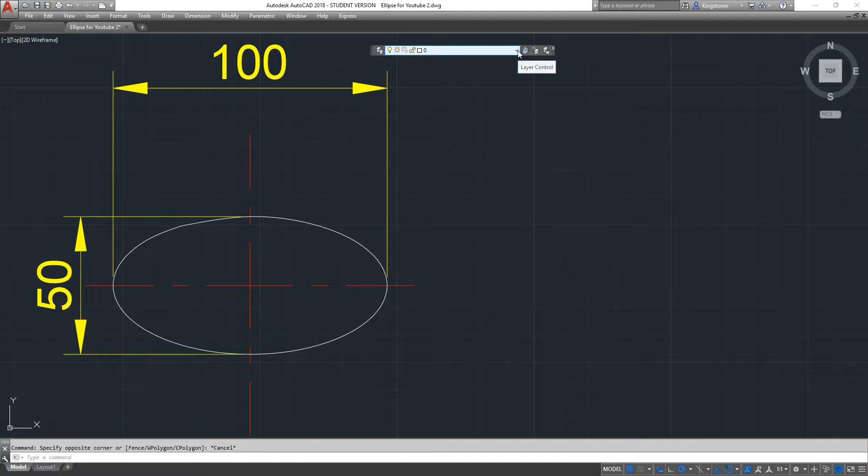So I'm going to turn the circles on that I've drawn. When I push the button, there they go. So you can see the minor axis, I've drawn a circle here at 50 millimeters in diameter, and for the major axis I've drawn a circle here at 100 millimeters in diameter. So that's how we're going to draw it. They're dead over the center, as you can see.

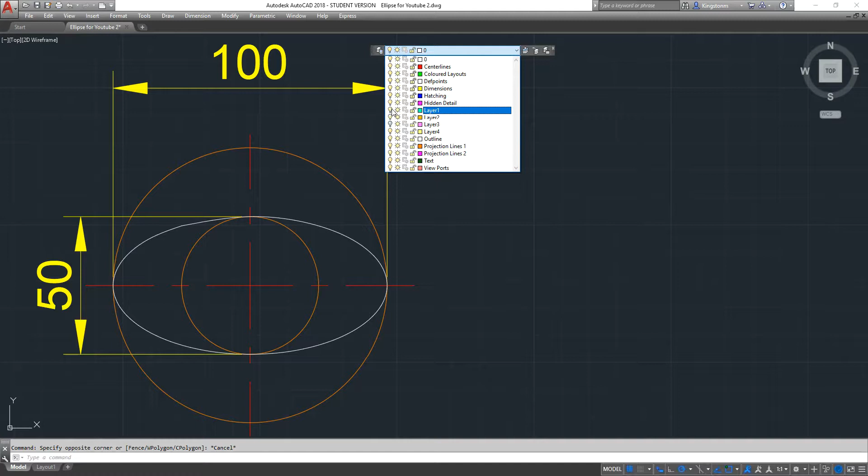Now what we do is we put some projection lines through the center of the circle. So we've got a whole lot of lines going through here. These lines can be at any angle, so long as they fit within the 90-degree quadrant. You can put as many lines through here as you want.

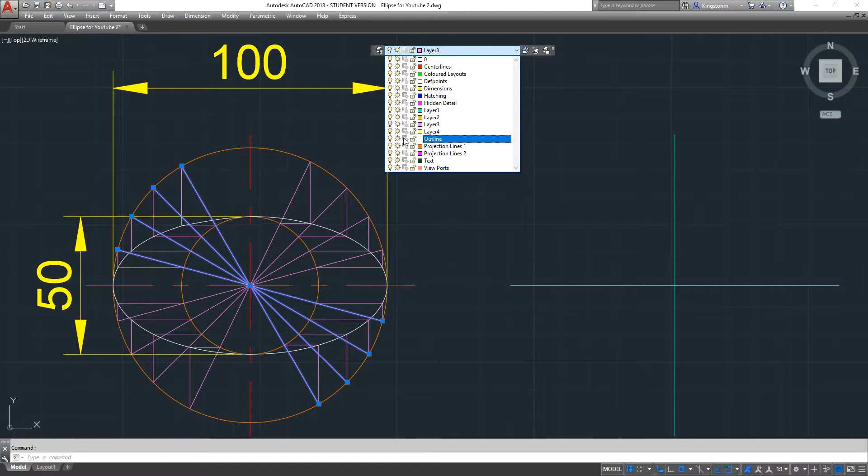It's actually better to have them slightly closer to the center or on the horizontal line, instead of having more up in this portion, because the curve across through the top is actually quite shallow, whereas the points on the end that you're going to have to put in, it's turning quite hard through this area on both ends, so you need a few more points through there. So what I'm going to do is I'm going to draw one beside it just to show you.

So I've got these two lines here, which I'm going to turn into center lines for you. So these are my center lines, so we're going to get into it.

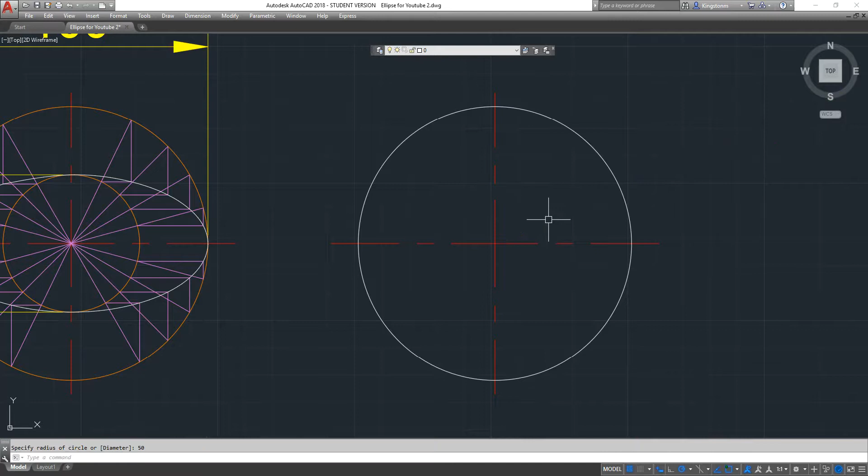So I need to draw a circle, 25 millimeter radius, or 50 millimeters diameter, and one at the 100. So I've just done the 100, and 25. So this one here is going to be the width of my minor axis, and the large one from end to end is going to be the major axis.

So there we go. We're just going to put some lines in. I'm just going to draw some lines across here. I'm not even going to put angles on them. So I'm going to put a couple down the end here. You'll see how I run them in a moment. It's slightly different drawing on AutoCAD than it is on a piece of paper with a set square.

Just put these in here. So you've got set squares, 30-60 set square, 45-degree set square. You can be using those with a T-square. So I'm just going to extend all these lines to the other side of the circle. There we go. I'm going to trim them off on the outside of the circle, just up here.

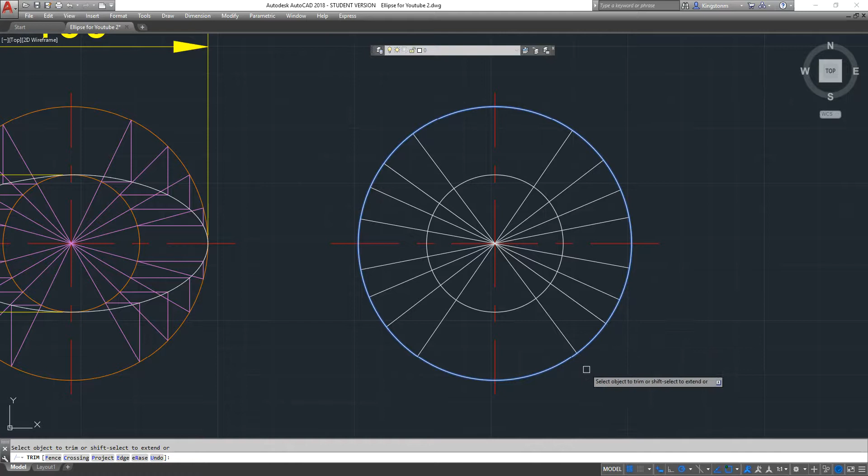So that's that done. My mouse is playing up again. So how this works, I'm going to put those two projection lines. Put those on projection lines 1, and we'll put all these other lines here on projection lines 2. Projection lines are just lines that you run through something. They're not going to be part of the main drawing at the end of it.

So the rule is that where the line coming from the center, this line here coming through the center, where it hits the internal circle, we draw a line horizontally across. And where that same line projecting up hits the outside circle, we draw a line projecting back down.

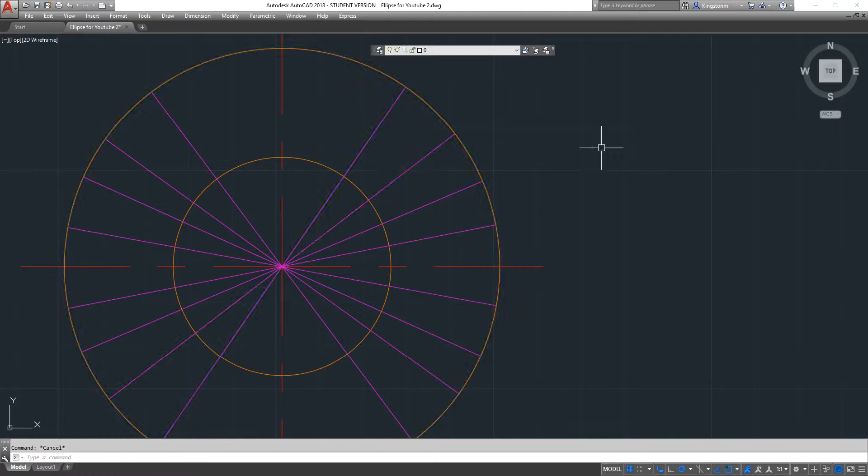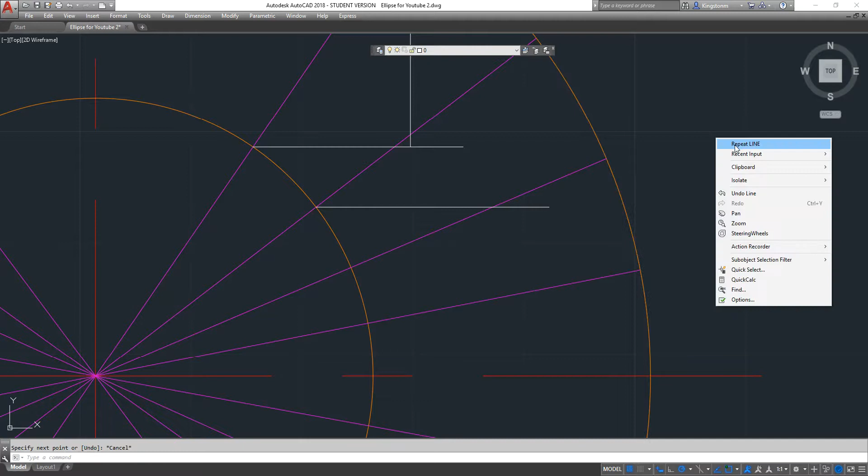So I'll start to run those in. So it's just going to go horizontal. And where the same line coming up hits the top there, it comes back vertical. Now I'm going to have to put that in on a perpendicular on this one, because it's pretty close to the center line, to the other line coming through. So the next one, horizontal, coming from the outside, perpendicular back to the bottom, horizontal, perpendicular.

That's giving me a series of points. I'm just going to trim these off. So around here, where these two lines meet, this blue dot is actually the point I'm looking for. Same with this one, blue point. They're all the same - that's where we're actually going to draw our curve through.

I'm just going to keep laying these in. I could mirror image this drawing, but just to show you, it's easier if I draw the whole thing out because it gives you a bit more clarity over what I'm trying to do. Anyone that's done a bit of AutoCAD will know I could mirror image this, but that's not the objective - I'm trying to show you how to do it.

So there's my horizontal lines, bringing them back down from the top, vertically back towards the center line. Next one. And last one.

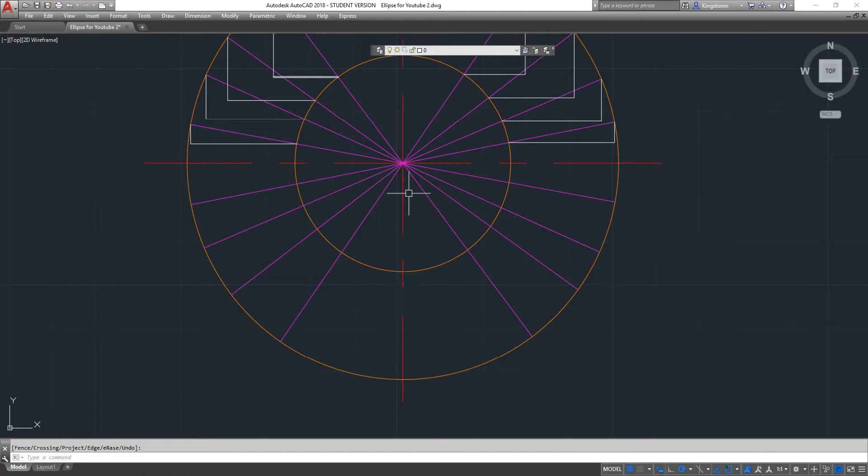There we go, trim those out again. We'll just trim the tags off them. So that's my top half done. As the lines come back down through the center, we're going to do exactly the same thing on the bottom.

Running them in horizontal. I'll just get these in here. It just takes a few minutes. Do them straight out the other side now at the same time. So just dropping the verticals in.

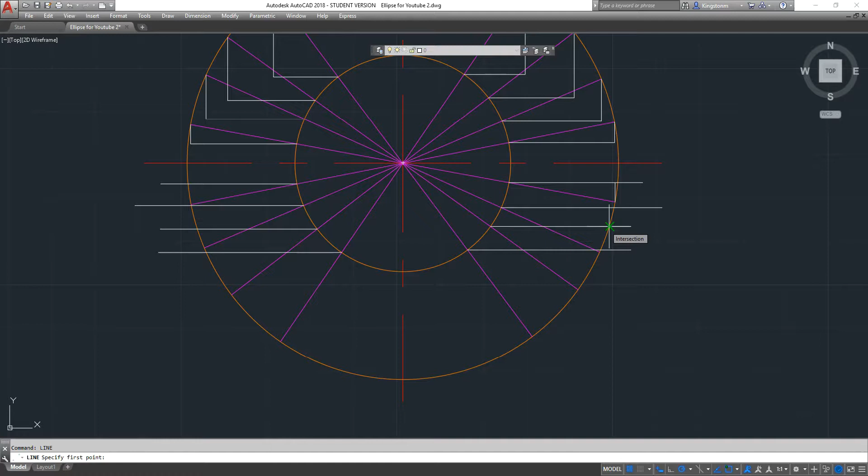Which one am I on there? This line coming through here goes back to here. This next line, this one coming through here, goes back to that line. And the last one, this line coming through back here, up to that point there, up the other side. That's it there.

Push the button too many times. This one here back to here, and lastly this point here back to that one there. So there we go, we've got all our points.

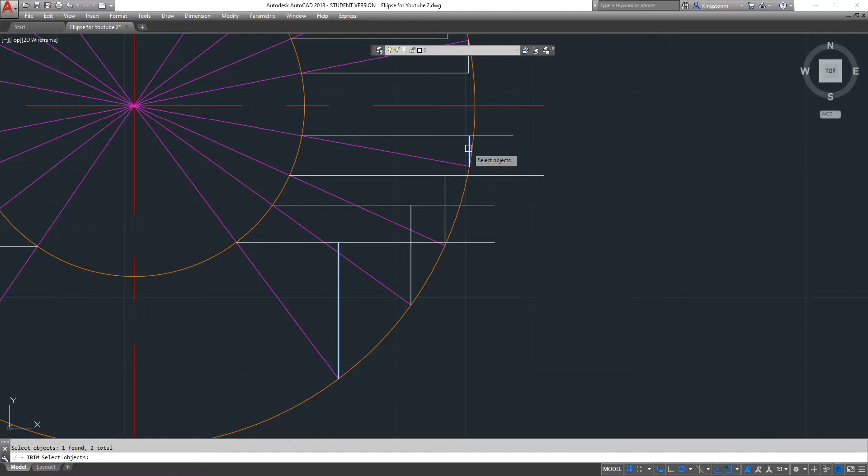Just trim these out again. I have to do that one a couple of times. My line's a wee bit too far, but anyway, that's it done on that side. And on this side, we'll go down to there, we'll do that, and then we'll do the next one.

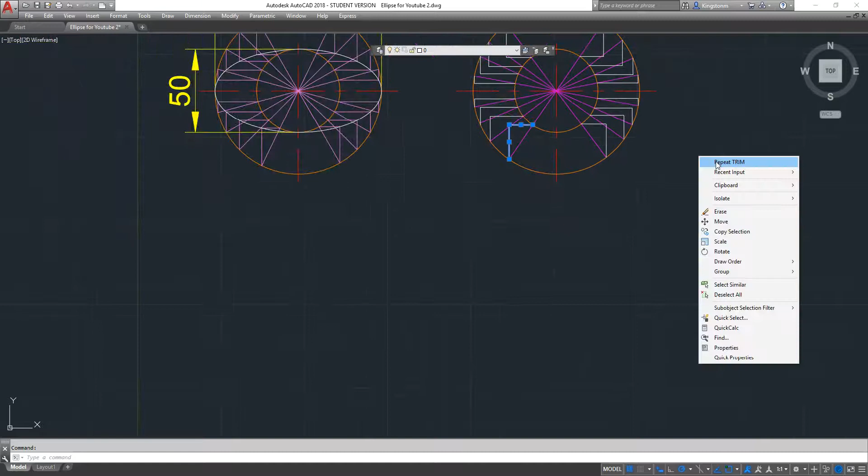Hitting my keyboard too many times. So I've got all my points that I'm looking for. It's the corner of these angles. That's how I'm going to run my line through. So I'll just pull that down into the center.

Getting a bit off the screen. How many minutes are we up to? 9 minutes.

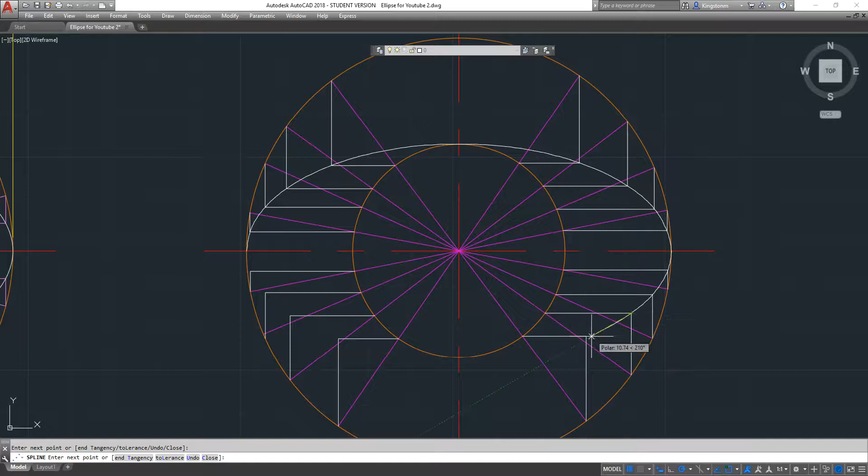So I'm going to put a spline line. What you're going to do is simply take a pencil and sketch through these points, just like I'm doing with a keyboard or with a computer. You're going to go through all these points with a pencil to create your curve.

And there's our curve. So that's how you draw an ellipse.

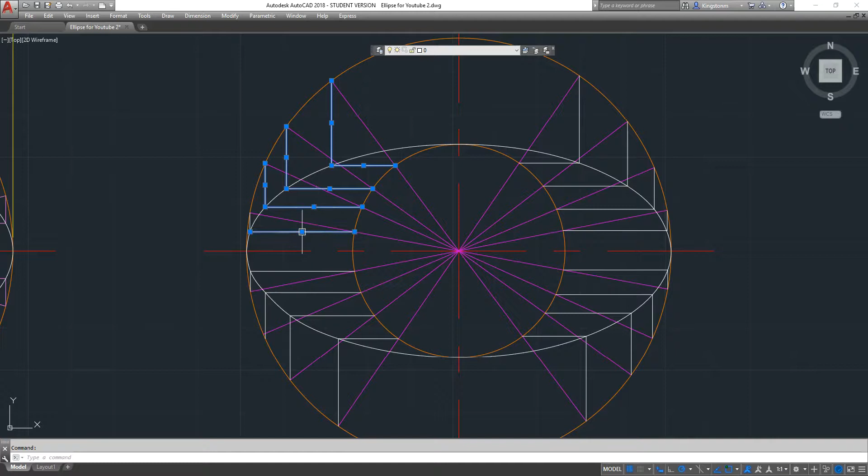What will I do? I'll put all these lines here onto projection lines as well, just so I can turn this off for a moment. Come down here, get onto the screen. Projection lines, number 2, and we'll turn that off.

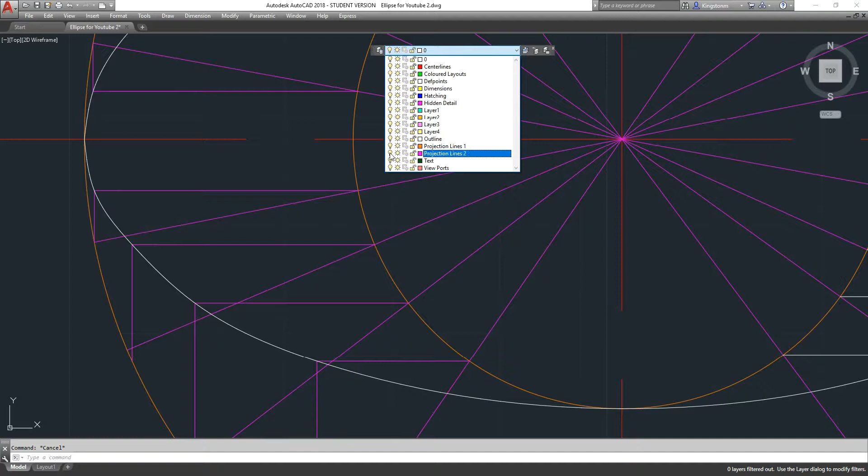Done. So there we go, I'll leave these ones on. So where the line came through, hit the circle, inner circle, we went horizontal. That same line from the center through that point to the outside point, we projected a line back to the vertical, and we got a series of points that we could draw our arc through. It's pretty simple, really - there's not much to it.

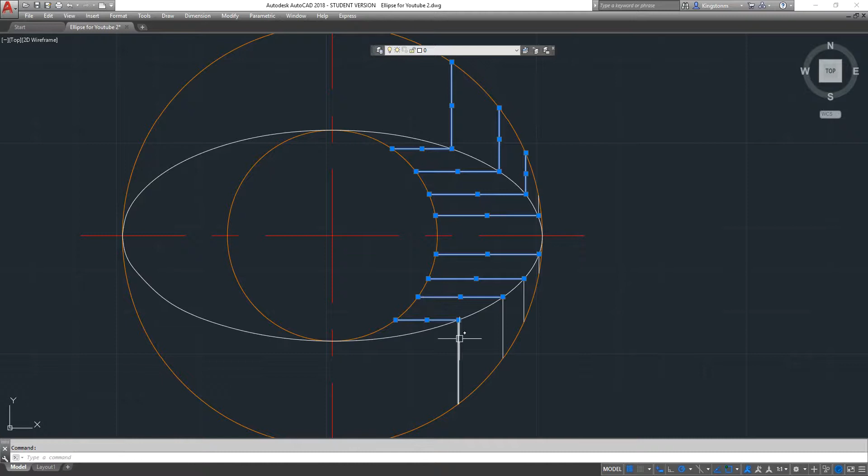So that's how you're going to do it. I'll just drop these in on here as well. So this is using a concentric circle method. There are other methods - I will get round to doing those drawings at the same time, or at another time, should I say. But that's how you're going to use your drawing.

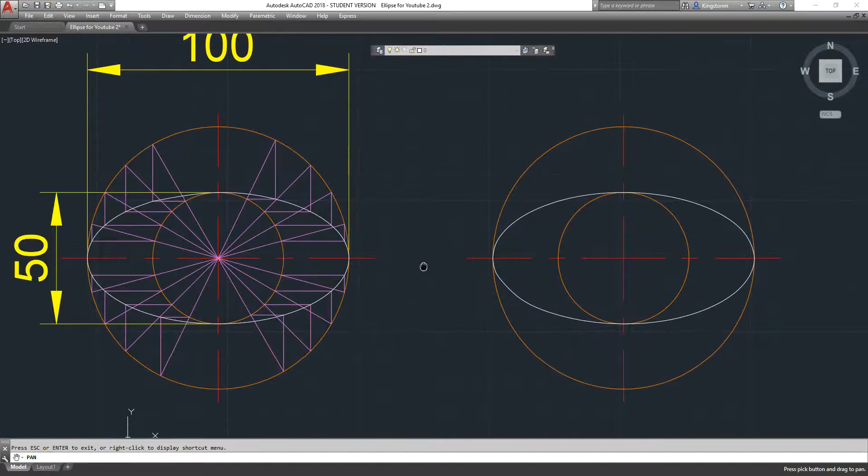Do your drawing. So I think there's a drawing that some people need to make. They have an ellipse that is 20 millimeters by 10 millimeters at a scale of 5 to 1. So 20 times 5 is 100 mil, 10 times 5 is 50 mil. Draw your circles, your 2 concentric circles - smaller one is the minor axis, larger one is the major axis, and then draw your ellipse just like that.